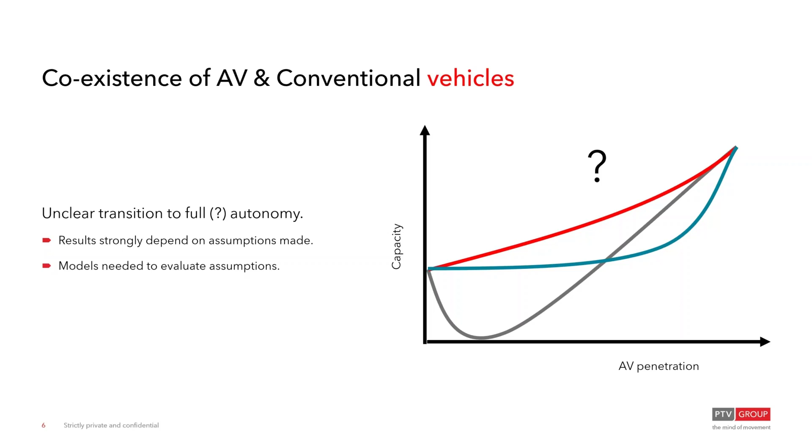Okay, so as I mentioned before, there were a number of cities who also are involved in the CoExist project, and these cities are spread throughout Europe. These cities actually look at a different aspect of the modeling tool that we're developing. So here we have a certain number of cities that look at the microscopic aspect, the individual characteristics of how vehicles drive, and then we also have some cities that look at the macro perspective - looking a little bit more about how the behavior of the vehicles can affect the wider traffic flow at a more macroscopic level as well.

So if we look at a few of the individual characteristics of each of those cities which are part of the project, first of all, we'll run through Helmond. Now, Helmond is the location of one of the project partners that's called TASS, and in Helmond is actually the test track for autonomous vehicles. So this is where we used the facility to test how the autonomous vehicles drive on the road network.

This allowed us to look at different penetration rates, but also some of those infrastructure aspects - looking at how vehicles interact at urban traffic junctions, things like vehicle to infrastructure communication, vehicle to vehicle communication, and also interactions within mixed traffic. So that existence of human controlled and autonomous vehicles on public roads, so that we can record that. The information that we got from that was fed back into our simulation model as well.

On to the next city, we have Gothenburg, and Gothenburg actually took a combined approach of both a microscopic and macroscopic allocation. Interestingly enough, there was also here looking at some of the shared space aspects, so how the coexistence of autonomous vehicles and human-controlled vehicles could actually influence modes of transport in perhaps some less formal infrastructure environments where we have perhaps plazas and piazzas in the middle of town where we see slow-moving vehicles, slow-moving pods through certain areas of the city interacting with cyclists and pedestrians and so on.

And also then in Gothenburg looking at some of the longer-term construction as well - whether or not the infrastructure that exists is resilient enough to accommodate a mixed fleet. So maybe in a horizon year of 2030, will having autonomous vehicles have enough capacity in the road network? Will the arrangement of some of that road network need to be changed in order to actually accommodate the vehicles and the level of penetration rates from autonomous vehicles that we would experience as well?

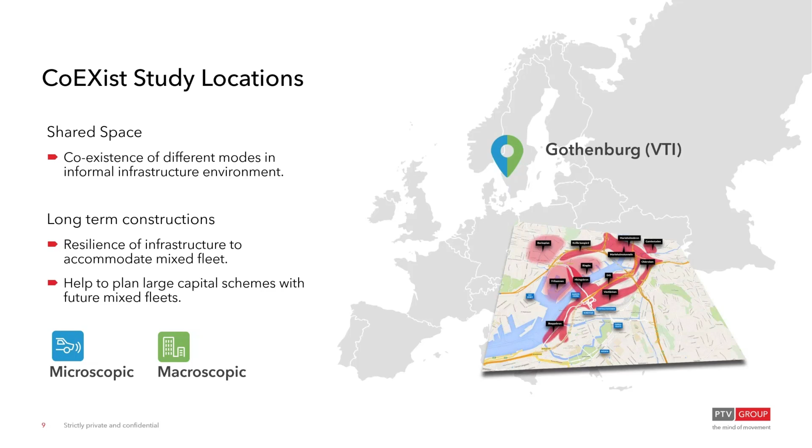Okay, well, on to Milton Keynes, and Milton Keynes really looking at quite a specific example and a micro example as well of how to operate the pick-up and drop-off activities. So vehicles pulling up outside buildings, passengers getting out of those vehicles, and then those vehicles driving themselves to a parking lot or a parking garage, parking the vehicles there, and then coming back to greet the passenger once they've finished their activity as well, and the types of technology that needs to be included in order to accommodate that.

There's also an aspect of urban logistics as well, and this is looking at the use of small kinds of delivery pods to make last mile delivery and collection as well.

And the final location is Stuttgart in Germany, and this was focused very much on the macroscopic aspect. So this is looking at the capacity of the network with mixed fleets, also the designation of roads and routes to certain types of vehicles.

Whether or not there's a segregation of autonomous vehicle only lanes or autonomous vehicle only roads within a city, and how that would actually affect other traffic flow, and how we might also look to influence some routing and journey movements that people make depending on the type of vehicle they're using—whether it's a human controlled vehicle or an autonomous vehicle.

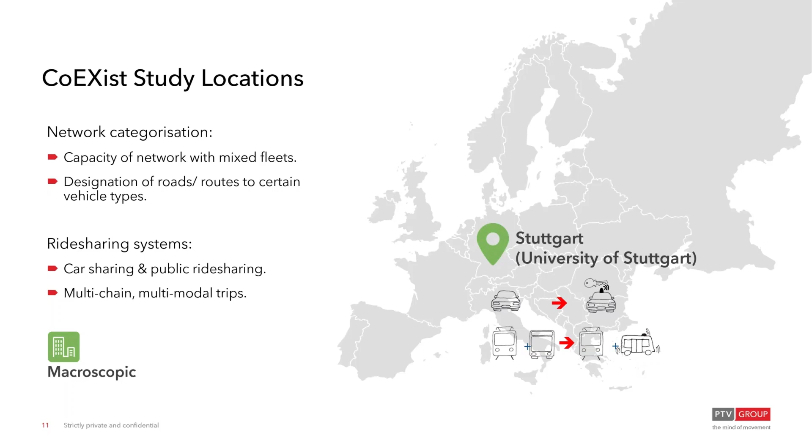Okay, so that was a quick overview of how the different study locations would actually operate and use the functionality that we were developing as part of this study. And now I just wanted to quickly run through some of those core tasks that PTV were heavily involved in as part of the project.

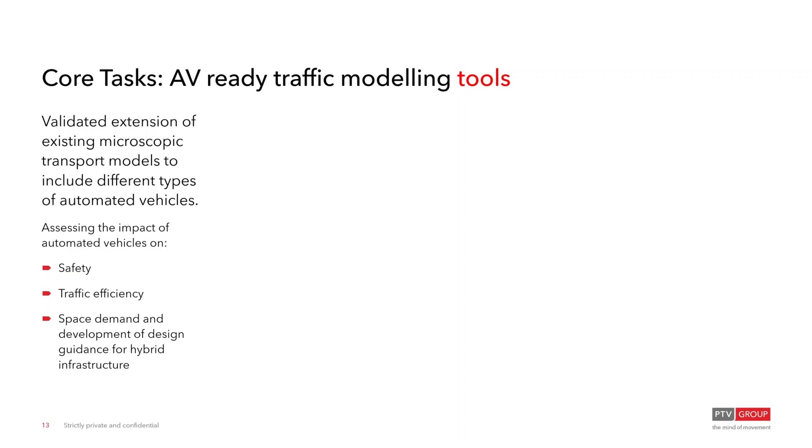So we have the ability and the role to make AV-ready traffic modeling tools. This is where we take our existing simulation tools and extend them to accommodate automated characteristics—so we have our microscopic transport models, and we extended those to facilitate different types of automated vehicles.

So maybe if we had 10% autonomous vehicles in this infrastructure, would we see a difference in capacity compared to now? If we had 20%, 30%, and so on, would we see a bigger difference? And providing that guidance and information about how the infrastructure would accommodate those new types of technologies and vehicles.

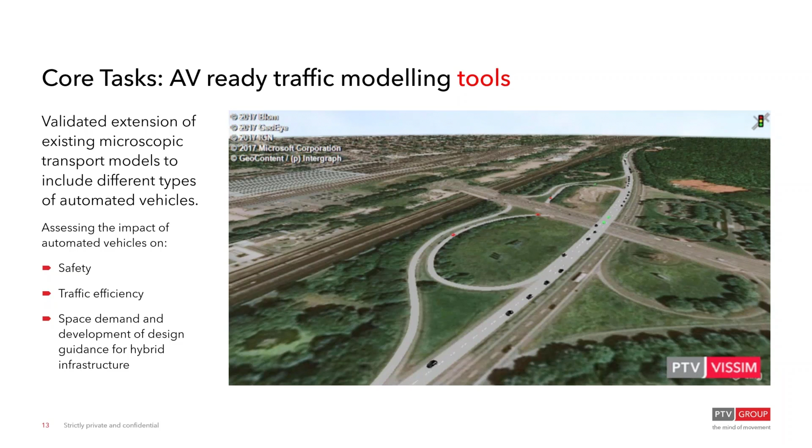So we recreated a real-time connection between the autonomous vehicle control logics as well as our microscopic modeling tools. We have a live digital twin of this area running in simulation, using the same AV control logic that is being used in the vehicles actually driving along that public road. So we can test further scenarios, perhaps add some extreme behaviors to how those vehicles are driving, and test those out in simulation before we actually operate the vehicles on the public road itself.

As part of that process, we looked at developing a set of model-based default parameters for AVs, as well as passenger cars and light-freight vehicles. That would allow us to provide functionality in the software where road authorities, traffic engineers, and consultants around the world could take these default behaviors and integrate them into their own projects.

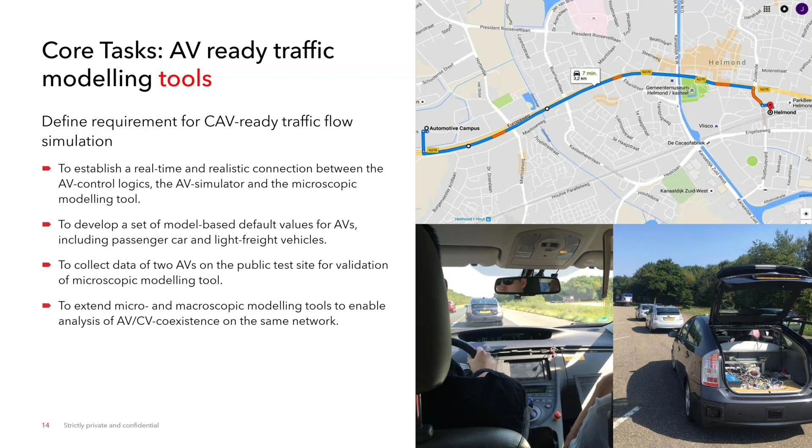So we ran the vehicles on this public test track and extracted results from them. The vehicles were tested with a number of sensors, LiDAR and radar sensors on them. We also had GPS tracking so that we could take the trajectory of these vehicles—how they were driving, the speed, the acceleration, deceleration, and so on.

From this data, we looked at taking our test track data and improving some of the interfaces within our software, having additional APIs that allow us to operate AV control algorithms within that test bed. We used simulation to create a digital twin of a test track and then tested specific AV control algorithms, focusing on use cases for automotive manufacturers, OEMs, and researchers.

As mentioned before, internally we improved our AV behavior by providing a default autonomous vehicle driving behavior within the software, which can help transportation engineers, planners, and traffic engineers test scenarios to reduce assumptions, and look at how we need to amend intersection designs to accommodate varying penetration rates of vehicles. We may need to add flexibility into our designs to ensure junctions still operate well during the transition period between human-controlled and automated vehicles.

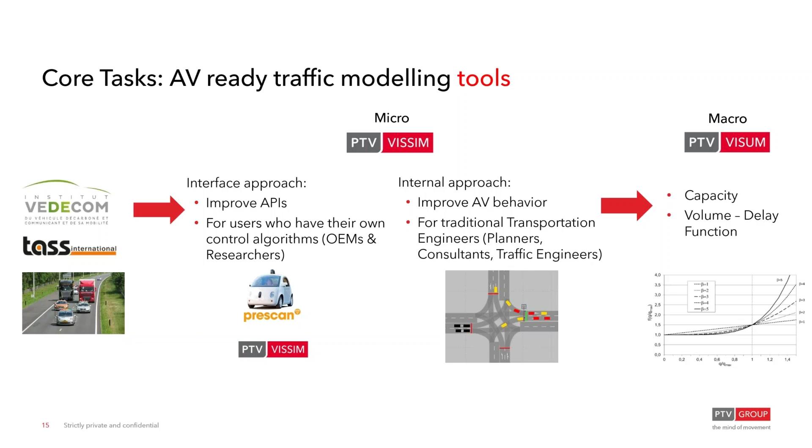I showed you before the public test track, along a corridor from the TASS facility into the city, which included a number of intersections, merging sections, and other infrastructure which autonomous vehicles need to negotiate when implemented on public roads.

As part of that, we also had scenarios about how the vehicles themselves operated, changing the following order of the vehicles. Sometimes we'd have autonomous vehicles following a human-controlled vehicle to see how it would react, or an autonomous vehicle following a connected autonomous vehicle, so the following vehicle couldn't communicate with the vehicle in front, but that vehicle was connected, perhaps to infrastructure.

We ran scenarios along our public test track, altering the order and configuration of vehicles to give us robust data and vehicle trajectories to build our autonomous vehicle logic in the software. We also looked at predefined time gaps, varying the following distance between vehicles and the reaction time between them.

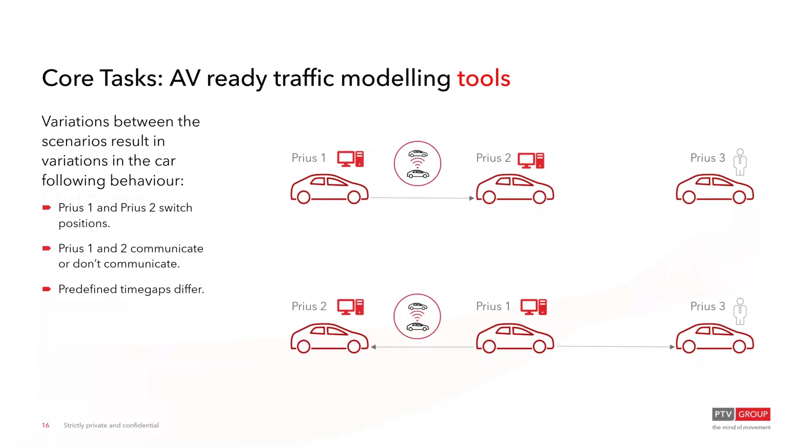Now I'm going to run through some of that trajectory data, the outcomes we recorded from vehicles on the public test track, and how we've taken that data and integrated it into PTV Vissim, which is available for our users now.

Looking at some of the test track data outputs, we were very interested in the difference in following behavior of vehicles as they traveled, looking at the variation between the non-connected and connected scenarios and how those vehicles react.

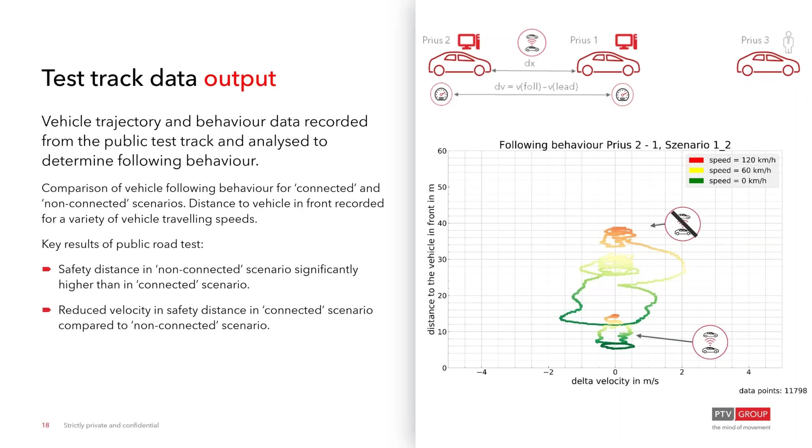They're communicating, which means that they're pulling away together at the same time. And we don't see large gaps opening, which then need to be closed up as well. So you can see the difference between standstill distance, which is around 5 meters, up to following distance at 120 kilometers an hour of 15 meters, really showing that there isn't a lot of variation as the vehicles travel faster. So this was part of the trajectory data that we took from the simulation, from the public test track.

And if we then looked at how that would compare to some of our default driving behaviors that we have in Vissim. So for those of you that are familiar with the software, you know that Vissim utilizes something called the Wiedemann car following behavior. And the Wiedemann car following behavior is a psychophysical model which looks to replicate the human nature of people driving.

So if we look at the chart at the top of the screen, you can see that when we were running our scenarios of our autonomous vehicle, there was a very linear relationship between the speed that the vehicle was traveling at and the distance to the vehicle in front of it. So as the speed increases, so does the distance, the gap between the two following vehicles.

Now, if we compared that to our default behaviors in Vissim, we can see that there's a lot of oscillation. So the lines look quite messy. There is a general trend where there is also that relationship between as speed increases, so does distance. But you can see by the circular nature of some of those lines that there's oscillation. Now, this wasn't really a surprise to us because, as I mentioned, Wiedemann is a psychophysical model. So it looks to replicate the way that we drive.

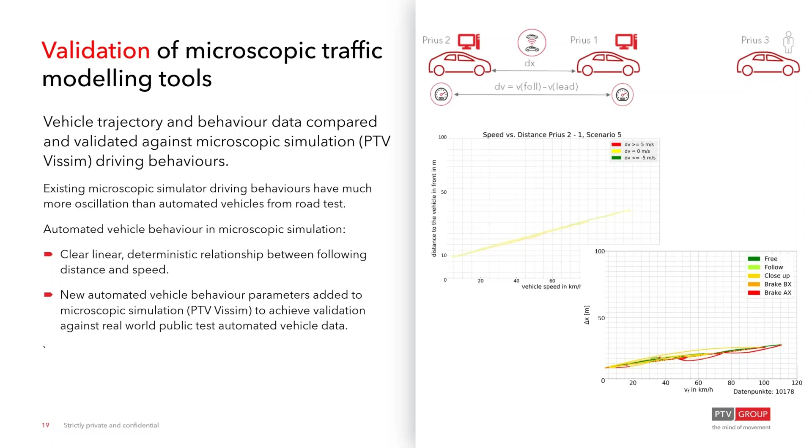So first of all, here's a video of actually Vissim running. So this is where we have our simulated vehicles, and within the list of our driving behaviors, we can see down here that we've added different driving behaviors that have an AV name, so representing that autonomous vehicle.

So these are all available as defaults to all users of the software. Now, if we look at the actual simulation model, we can see in the top link or the top road that we have our urban motorized behavior. So this is just our default driving behavior.

Now, the next line down is where we've created our AV cautious behavior. So here we have vehicles that are driving very safely. They leave quite large gaps to vehicles in front of them, and that's because they have something which is called a brick wall stop distance, which is always maintained. Now, what this means is that if the vehicle in front of the following vehicle were to turn into a brick wall, the following vehicle would still be able to stop before it actually hit the vehicle in front. So replicating that kind of quite cautious behavior.

Now, the next following behavior that we have, indicated by the blue simulated vehicles, is our normal behavior. So this is where we look to replicate an existing average driver whilst using autonomous logic. So this is replicating the ability of sensors to measure the distance and the speed of other vehicles and react on that as well.

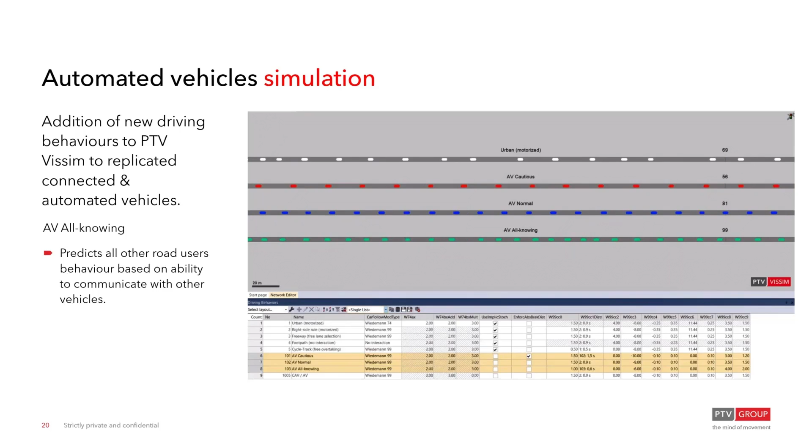Okay, the other thing that we needed to influence, because as I mentioned, we ran scenarios where we were altering the control of vehicles from being connected to just being automated, meant that we actually needed to also influence the software where it needed to recognize the type of vehicle that it was following and then adjust its behavior based on that. So here we can actually see that playing out in a simulation where we have autonomous vehicles and we have connected autonomous vehicles.

And as you can see, the autonomous vehicles are following the connected autonomous vehicles with quite a small gap, whereas the connected autonomous vehicles are leaving a bigger gap when they are following autonomous vehicles as well. So it's actually being able to influence and vary the following behavior depending on the type of vehicle that is leading or the type of vehicle that's in front.

So that is particularly interesting for things like platooning, where perhaps we would have large freight vehicles, heavy goods vehicles, and so on, and actually being able to influence the behavior of following vehicles, where you could potentially have mixed platoons of vehicles also operating on interstates and expressways and so on.

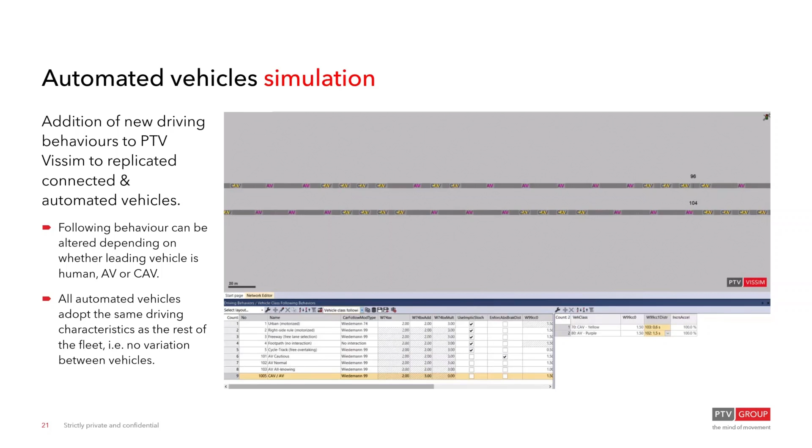Okay, so now a little bit of information for what those parameters actually mean within the software and those that we've changed as well. So the first one, as I mentioned, is that we have added a parameter that is called enforce absolute braking distance. And this is where the following distance of the vehicle is defined by the braking distance and the standstill distance. So ensuring that if a vehicle were to stop abruptly, the vehicle that is following would also stop before it came into contact with that forward vehicle as well.

So this is now an option that is available as driving behavior, a checkbox that can be implemented, and the impact will be that it will have a safe application within the software.

So you will see that capacity, for instance, would drop because the vehicles are following each other with a larger distance than perhaps we would expect before, and that's to replicate perhaps in that transition between human controlled and automated vehicles, the safe aspect as well.

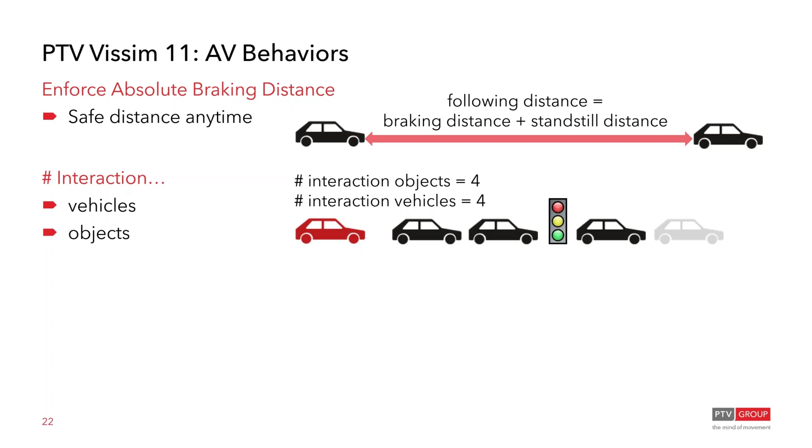So the addition that we've made is being able to specify between objects and vehicles. So now we don't have to have a matching value for both, but we could actually have number of interaction objects and number of vehicles separately as well. So the idea there really is that perhaps we could have an automated vehicle which can see a signal head because it has vehicle to infrastructure communication enabled, but it maybe could only see 1 or potentially 2 vehicles in front of it because the sensors couldn't see through the leading vehicle.

So for instance, here we may well have a mixed fleet where we have human vehicles and other automated vehicles. It could be that our connected autonomous vehicle is following another connected autonomous vehicle, but then there's a human controlled vehicle that is in between them and the traffic signal. So therefore it can't communicate with all of the vehicles in front of the signal, and therefore needs to maybe leave a bigger gap, and so on as well.

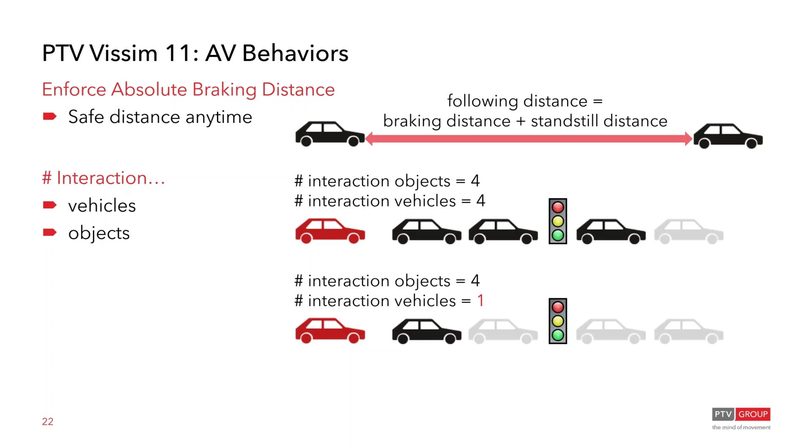Okay, you saw in the simulation how we can also vary that headway or the following distance depending on the class of the leading vehicle. So this could be that variation between autonomous vehicles and connected autonomous vehicles following human-controlled vehicles, allowing them perhaps to leave a bigger gap because human drivers are a little less predictable. Also, autonomous vehicles perhaps following larger vehicles. So, as I mentioned before, large freight vehicles, delivery trucks, and so on. So being able to apply those different behaviors to different aspects and different vehicle types as the simulation is running as well.

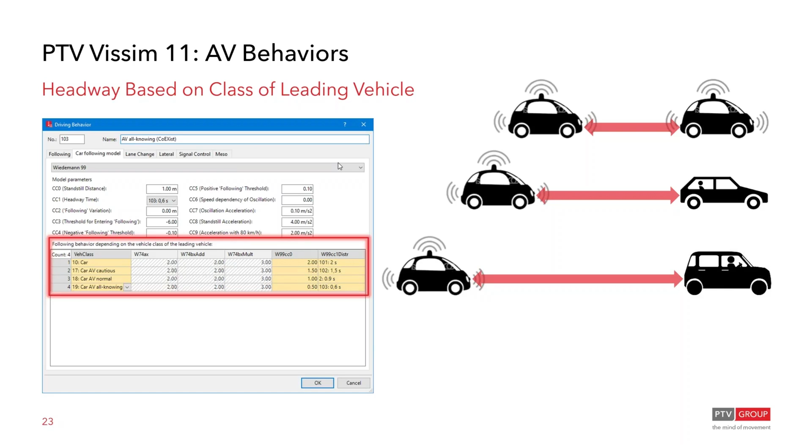Okay, another key aspect is taking away some of that randomness that we saw. So when we looked at those Wiedemann parameters and the Wiedemann oscillation of following which exists within Vissim, you could see that when we needed to replicate the autonomous vehicle, we needed to take away some of that randomness. So we can also remove some stochastics from our simulation. So this is an element of randomness that reflects our human behavior as well. And that means that certain distributions can actually be removed.

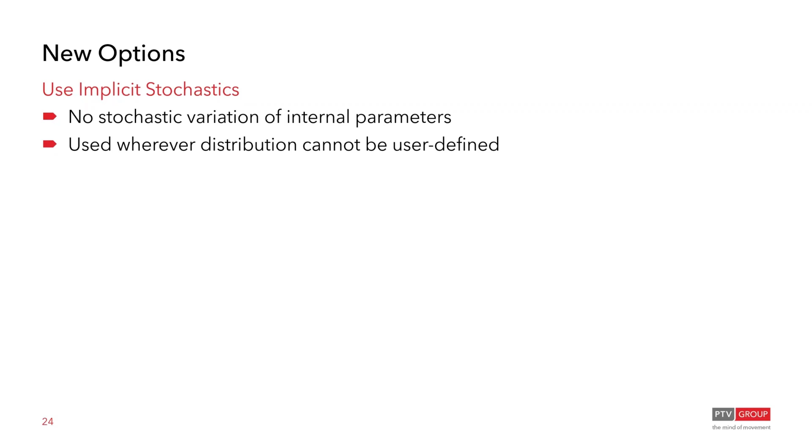So again, assuming that vehicles, when they are automated, they would travel at a specified speed because much like cruise control in modern vehicles, you can travel at a steady speed rather than a human driving, perhaps always having to maintain their foot on the accelerator pedal and perhaps applying a bit of pressure, then easing off. That actually gives a distribution of speed, whereas automated vehicles and other advanced driver assistance provide the ability for vehicles to travel at a constant speed. So being able to actually influence some of those stochastics has also been built into the simulation as well.

We also then have increased acceleration, and this is particularly interesting when we look at some of that trajectory data as well. Looking at when we have vehicles pulling away from a traffic signal, for instance, if vehicles are automated but not connected, again, a vehicle will pull away and then the vehicle behind will have to react on it and then accelerate. And maybe it accelerates at a faster rate in order to close that gap up again. Likewise, when vehicles are connected, they need to pull away together to maintain a consistent headway. And when that happens, we also need to facilitate increased acceleration as well, so that we can actually have those two vehicles following each other at a constant distance.

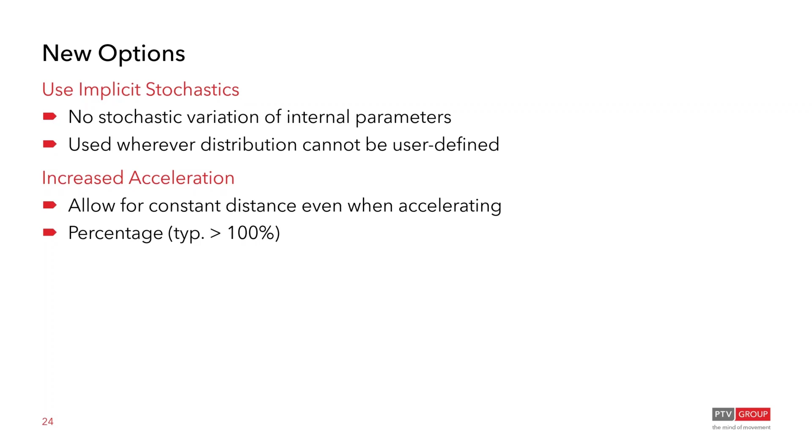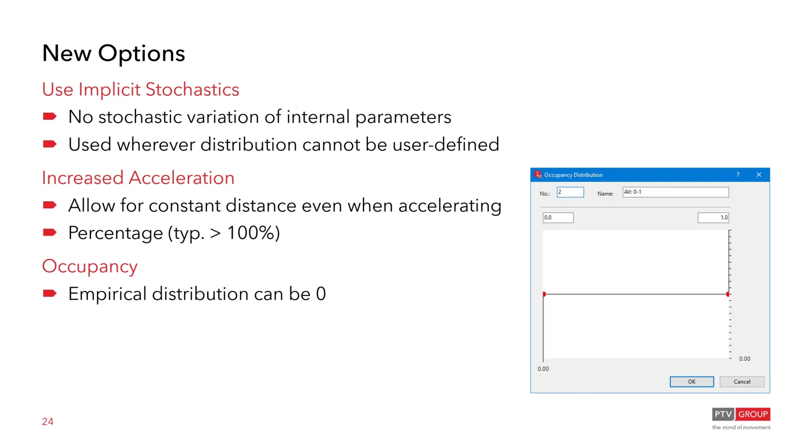Okay, and another feature that was added was that we can actually set the occupancy of vehicles to 0 as well. So for those people that need to run simulations where perhaps the number of passengers is important, so looking at how services might operate in a city, picking up and dropping off. Currently in PTV Vissim, we would always require an occupancy of 1 because there would be a person driving that vehicle. But in the functionality that's been added, occupancy can actually be set to 0 to replicate that automation as well.

Okay, so just to summarize really the next steps that are involved in CoExist and also what we've been doing with the software as well. So the next steps for CoExist are that the 4 partner cities are now taking the functionality developed in the software and applying it to their own infrastructure.

So going through that process of testing their existing road infrastructure within their cities, looking at different levels of automation, looking at different penetration rates, consumer acceptance of those technologies, and identifying whether or not their infrastructure, their traffic signals, their on-ramps, their merge areas, and so on, can actually accommodate the new behaviors that we've seen as part of our real-world autonomous vehicle testing as well. And undertaking that assessment and looking at whether they need to make changes to their infrastructure as well.

And here at PTV Group, we are also extending our automated vehicle technology. So we've also been looking at developing platooning, so how we can more effectively platoon vehicles within the software, again, having that as a default functionality where people can simulate quite easily the impact of platoons, varying the size that those platoons are, varying the type of leaders, the speed that those platoons actually have as well.